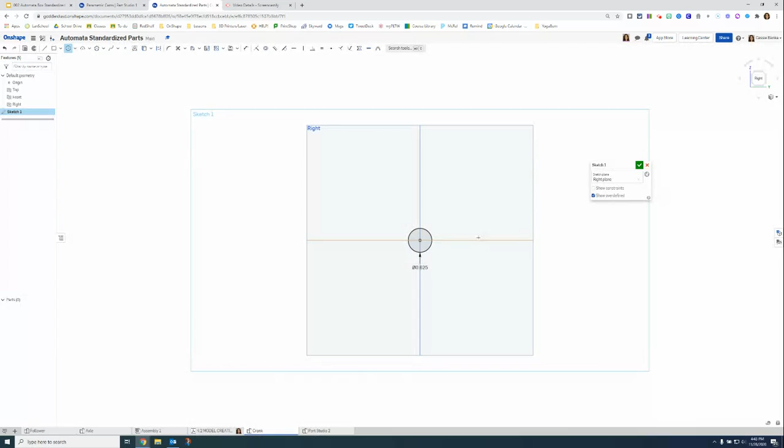So here we go. C for circle. I want to kind of hover so that it's aligned with my origin. 5/16, so I don't have to do any math.

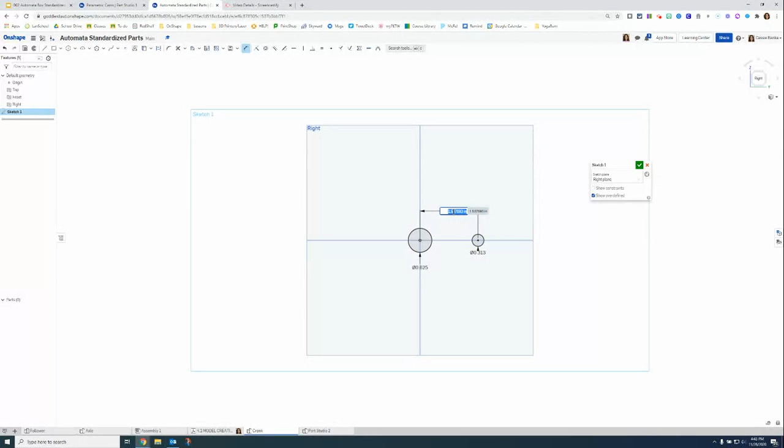And there we are. Now, the next thing that I need to do is I'm going to dimension the distance between these two circles. So D for dimension. And the distance between them should be 1.5. By doing that, these two circles now are fully constrained. They have both a location, a diameter, and a distance from each other. So that gives me this shape. Now I need to add the lines and make sure that they're smooth.

I'm going to grab L for line, and I'm going to go from, let's just go way out here. Escape, L for line. I'll zoom in a little bit so you can see a little better. Escape. And what we're going to do is we're going to make these lines tangent to the circle. And I do that by going up here. You may have a drop-down menu where you see a couple of these other symbols to find the tangent, or you can search tangent over here in the bar, T for tangent too, which kind of works.

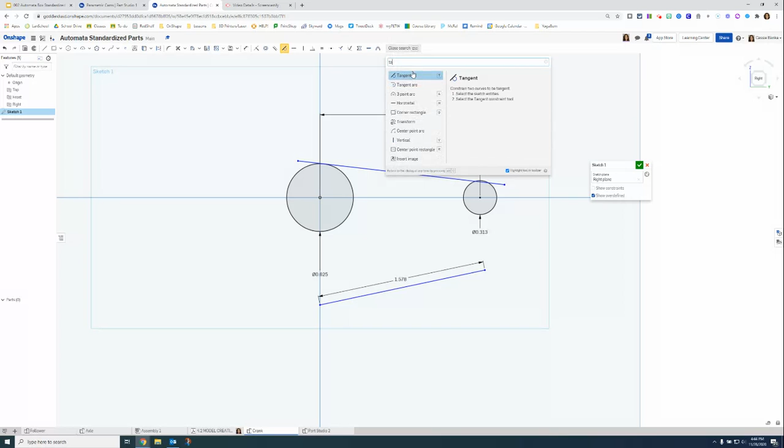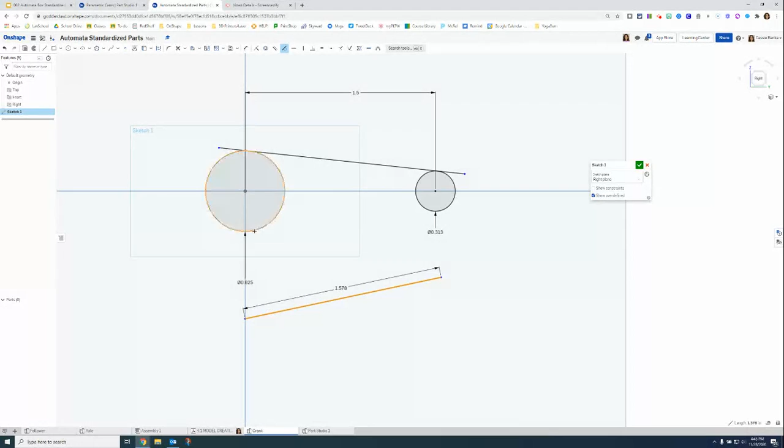So what we did, just to show you again, was we chose the tangent constraint: click the line, click the circle. So it's tangent over here, but not over here—you can see it's kind of intersecting. So I'm going to click the line and click the circle, and do that down here. Click the line, click the circle. Click the line, click the circle.

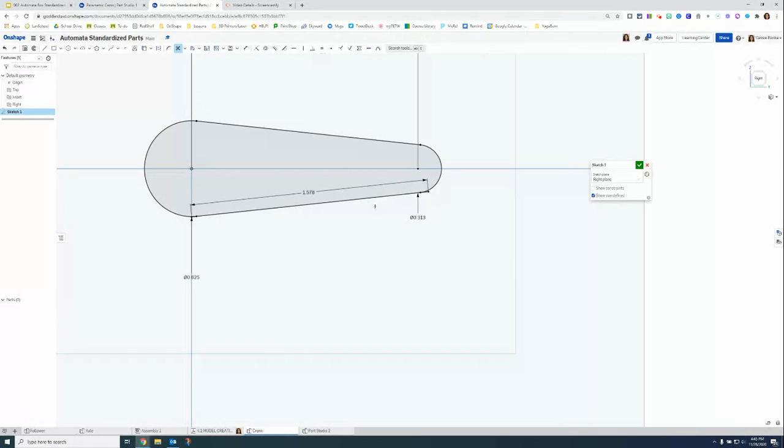Now I have the start of my profile, but I need to trim away the things I don't need. So I'm going to trim away this little line, and go ahead and get rid of the arcs. Now you can see I have my pinball paddle, but I have this little extra at the end.

So there we go, I have the outline of my pinball paddle, which matches what this bottom part should be. Now before I extrude, I'm going to sketch in my square for the axle hole. This is 0.26 typical, so all sides of that square will be 0.26. When I go into the crank, I'm going to choose R for rectangle, which gives me a center point. And I'm going to constrain it to the origin—that's one of the reasons why we do that.

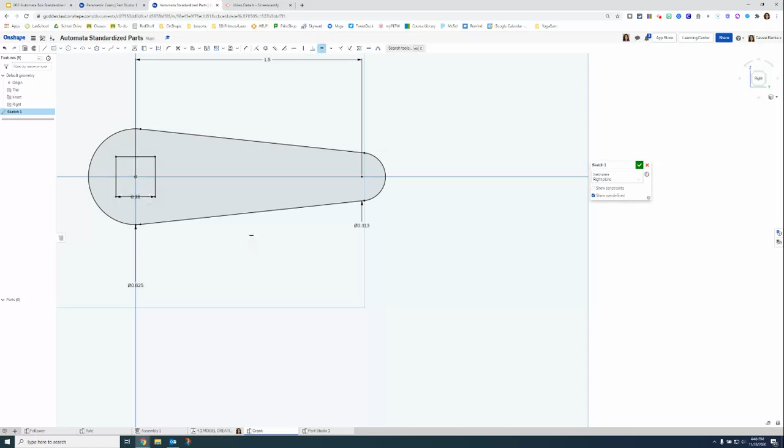I'm going to dimension it 0.26. And I could go ahead and dimension this other side 0.26, but I'm going to use my equal constraint to set it equal. I'm done with my sketch, and I like what it looks like.

So I'm going to Shift E for extrude, and I'm going to choose the outside part. Now this extrusion will be at a depth of 1/4 inch, so 0.25.

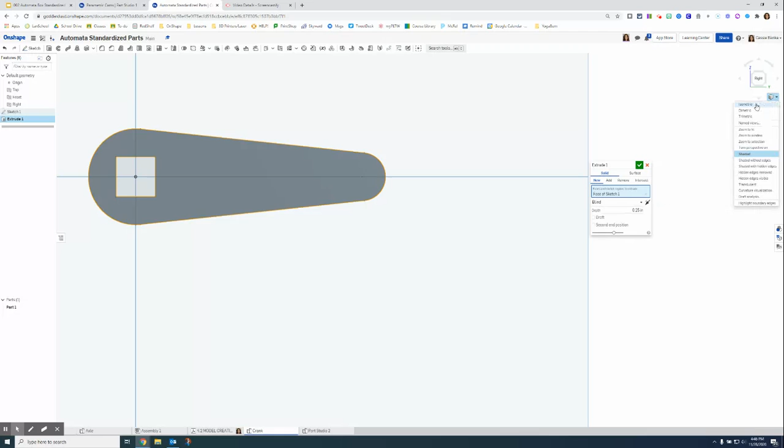I'm going to go ahead and put this in isometric view so I can see what's going on there. I am going to send it the other direction, pretending like the box is right here. So we got that—there's the beginning of our crank. Everything looks good, everything looks smooth.

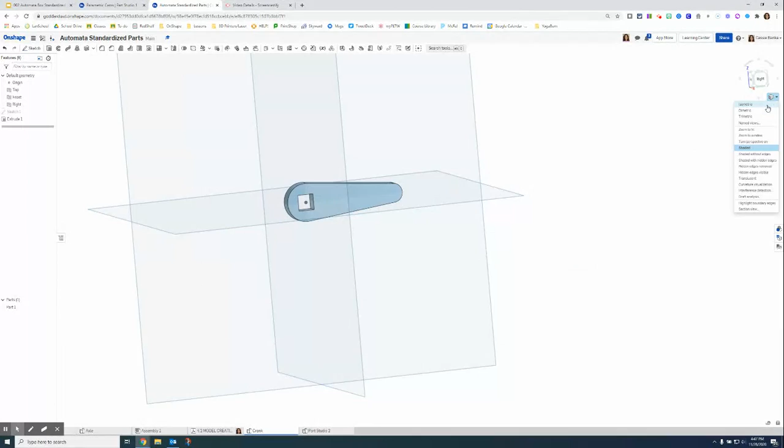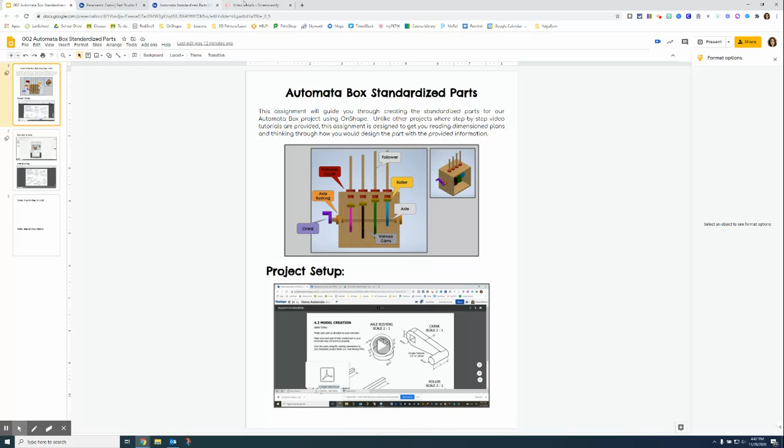I'm going to put it in isometric view again, and let's look back at what it should look like. So if this were the side of the box, then my handle is going to go backwards. And if I look at my part file here, I know I am going to be using this sketch from the bottom that we did on our pinball pattern. I am going to extrude this 5/16 inch circle at an overall depth of 0.75.

So we've got a little bit of math here. We've already extruded from our pinball pattern 0.25 of an inch. That means the leftover part here is going to be a total of 1/2 inch. So 0.25 plus 1/2 inch would be 0.75.

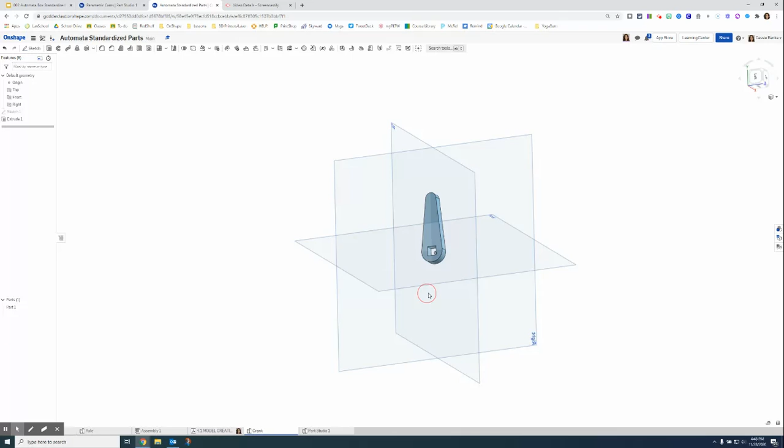Okay, when I'm choosing my part to sketch on, let's hide these planes so I don't get confused. I'm actually going to go on the back side—for me, that's the left side of the face. And we're going to start a sketch on this surface. Let's make this sketch one visible so I can see that center point. C for circle, and let's go ahead.

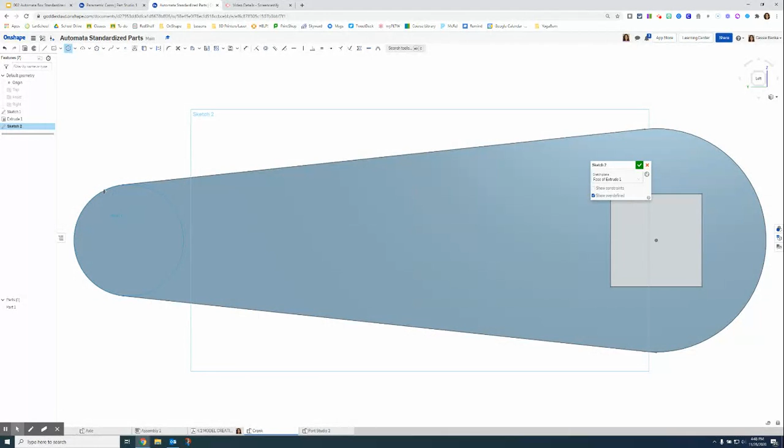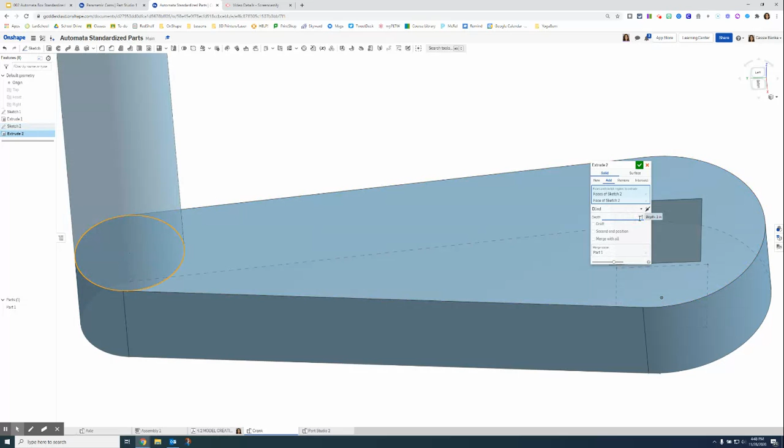If I hadn't trimmed, I probably could have used some of those sketches already, but I did. So we're going to go ahead and do 5/16 and dimension that. And remember, we've already extruded 1/4 of an inch, so I'm going to extrude just this circle for the additional 1/2 inch I need to finish out my part. And there we go.

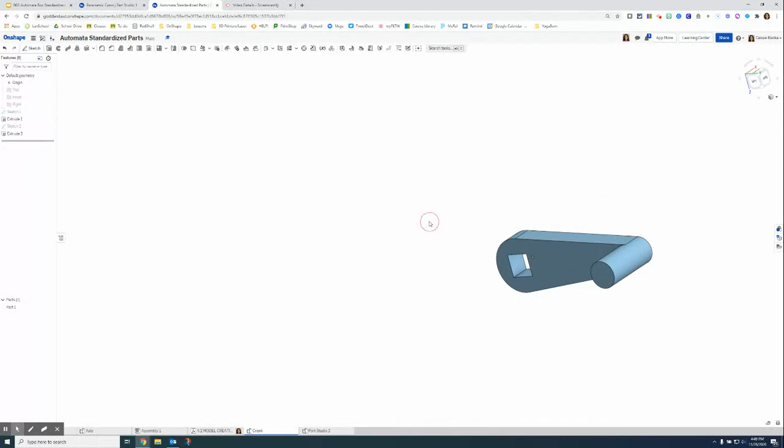We've got a nice looking handle or crank for our automata box project. Everything looks pretty smooth, looks pretty good. And if we hide some of our sketches, then we've got better edges. So there we go—that is how we create our crank from our sketches.